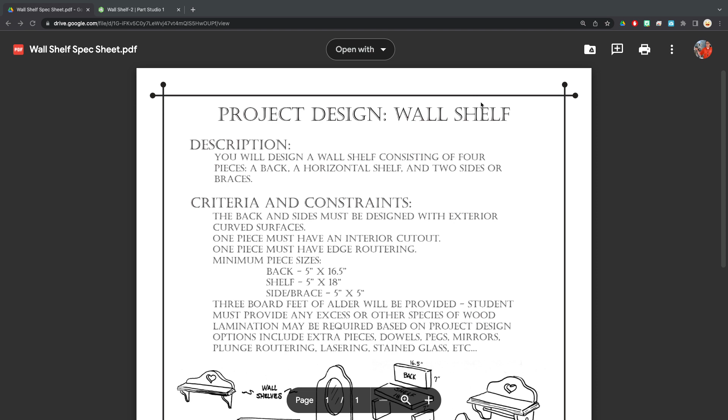What I'm going to do for you for the next few minutes is talk to you about your next steps as far as the wall shelf. First thing I did was print off some sheets so you guys had a place to draw some rough drafts. After you get your rough draft taken care of, we can start designing something in OnShape.

Now, this is the first time we are looking into something in 3 dimensions. Your cutting board, you only needed to draw in 2 dimensions. So we're going to look primarily at this very basic wall shelf here and build off of that, and figure out how to best incorporate OnShape and put it together so it's in 3 dimensions.

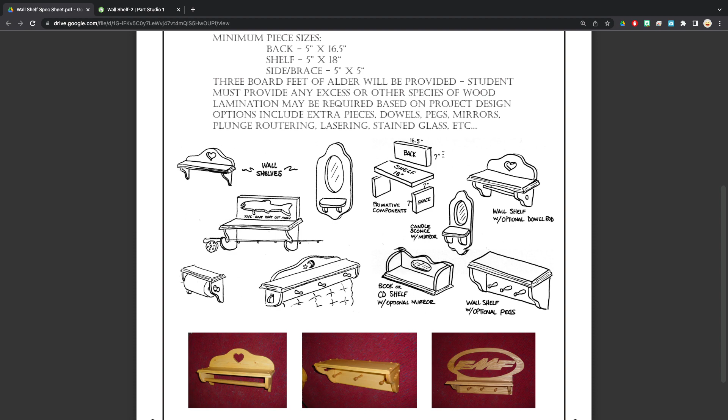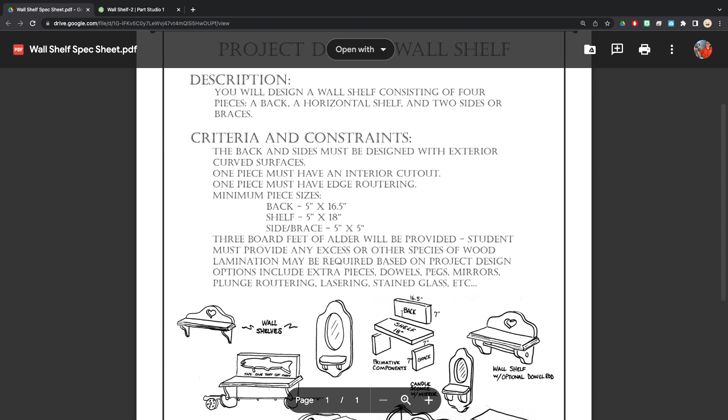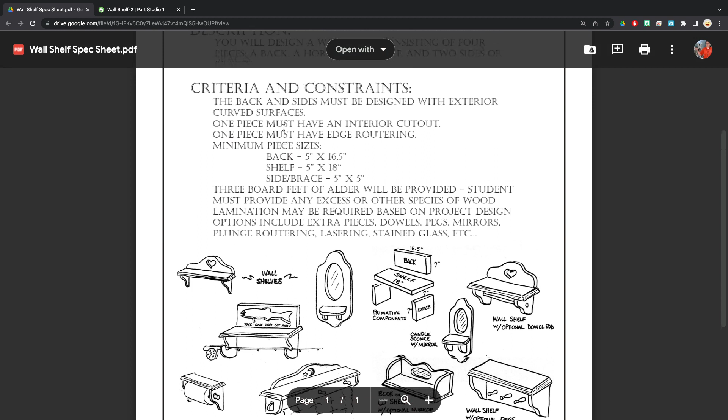For those of you that took engineering with me last year, this is just a simplified version of your pen project. So we're going to look at our criteria and constraints, relaying back to this graphic right here, where it's got back shelf 18 inches brace, called primitive components that you can't quite see because my screen is in the way. These primitive components are located also here as far as measures.

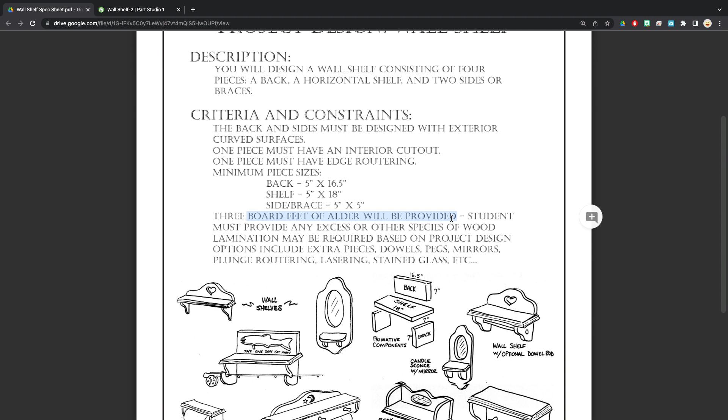So we're going to look at 4 pieces. We've got 2 side braces, minimally need to be 5x5. A shelf that's got a 5-inch by 18-inch component, a back shelf that's 5-inch by 16.5. And the one thing this does say is it's going to be cut out of 3 board feet of alder that will be provided. That alder is roughly about 3/4 of an inch thick.

So what we're going to do is we're going to start with a new OnShape page. I just went into OnShape, did a new document. I called this wall shelf 2 because you may have seen my previous wall shelf that's got the C-shaped brackets for my first name. Very basic. Okay, I want to walk you through how to get all of these parts put together.

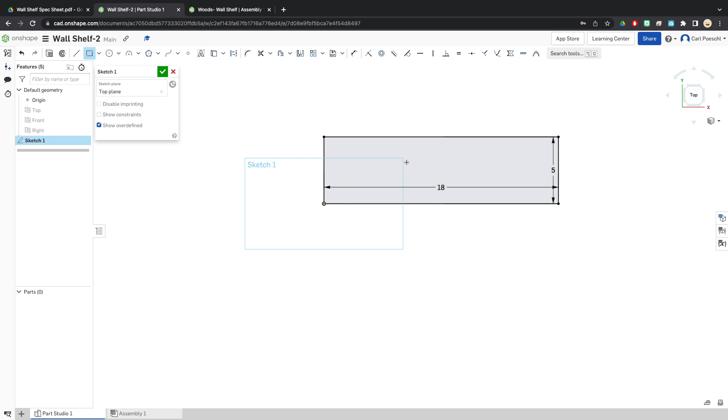So first thing I'm going to do is start with my shelf. I'm going to use these basic measurements here, and this is all minimal. So 5x18. I'm going to start at the top view, new sketch, top view, mute everything I don't need. I'm going to do a rectangle, corner to corner. I said that was 18 by 5. There's our shelf.

Go back into isometric view. We're going to do something called an extrude. So what you saw me do, let me backtrack just a bit and slow down. If you're in this sketch where you're editing all of your dimensions, you just need to click this green check mark and you're done with your sketch, and you have this rectangle.

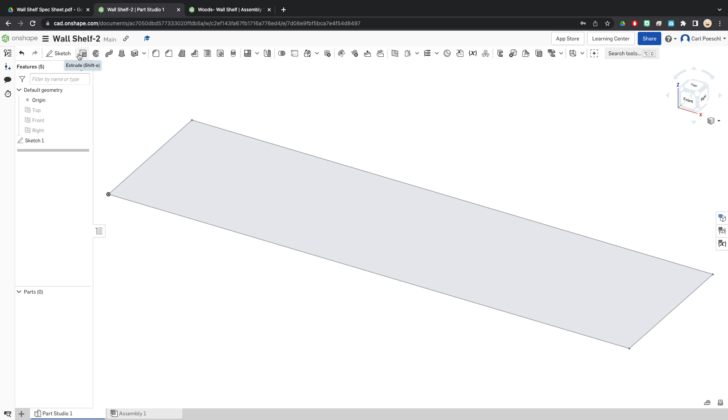Now, what we haven't talked about is how to make things in 3D. You'll notice the button next to sketch has these 2 little boxes. It's called an extrude. So if I click extrude, I can then go ahead and grip my rectangle and I can start to make a 3-dimensional object.

This is about where we stopped with the power of OnShape with your cutting boards, because we just assumed you're going to have the same thickness throughout. The majority of you went with about 1 inch or potentially 3/4 of an inch, and we're going to do that same thing in OnShape with our alder at 3/4 of an inch.

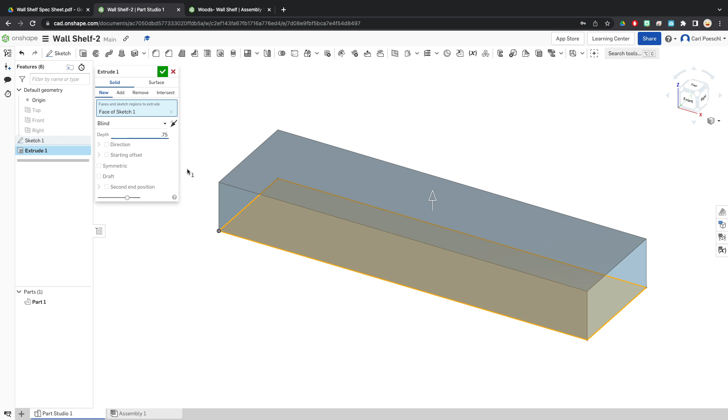So all I did was hit extrude, I clicked the rectangle. It's going to say we're going to create a new solid out of the face of sketch 1, and we're going to go at a depth of 3/4 or 0.75. Hit enter and finish our extrusion, and this is going to be the bottom of our shelf.

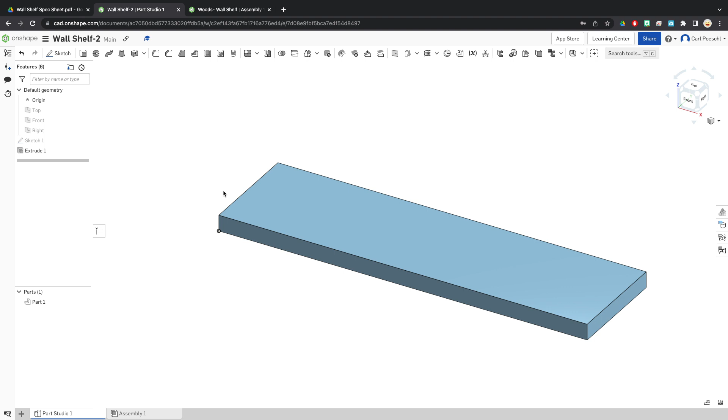Awesome. If you look at my other piece though, that's 1 of 4. So how do I make the other pieces to it? This is one of my favorite parts of OnShape, is that literally every single document that you need to put together is going to be contained within this document. Every single part that you need to make is going to be contained inside of this document. So if you take your cursor down into the lower left-hand corner, you can insert something called a new element.

And what we're going to do is create a new part studio. You'll notice what I'm drawing on right here is called Part Studio 1. So you can imagine if I click a new Part Studio, I now have Part Studio 2 down here. This is going to get a little bit convoluted though, so I'm going to call this something different.

And the way you do that is you either right click or hit control click if you're on a laptop like your Chromebooks, or God forbid Mr. Godwoz's MacBook Pro. So control click or command click or right click if you have a mouse, hit rename. And I'm just going to call this shelf.

Now I can go in and rename my Part Studio 2, which I'm going to name back. And I'm going to create one more.

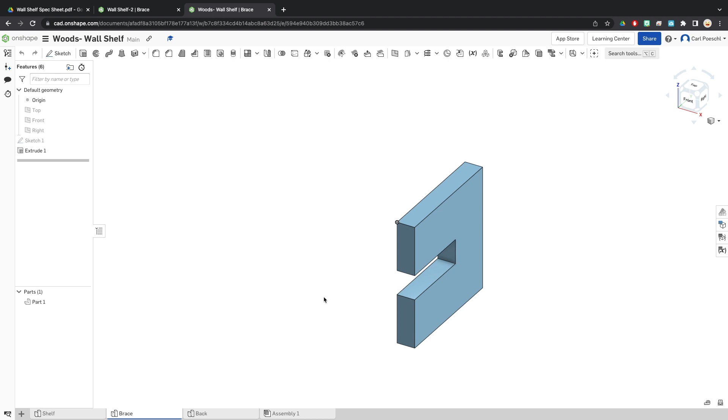And we're going to call this the brace. Now the coolest part about this is that I did say you need 4 parts in total, but I only need to draw this once. If you look at my first shelf that I made just for practice, you'll see it says shelf, brace, and back. I don't need to make more than one of these braces for this to work. I'm going to go ahead and change that when I'm ready.

So I've got my shelf taken care of. Let's go ahead and start working on the back. The back, I like to have the geometry on the front plane. I'm going to look at it from the front side. That's how we're going to take care of things.

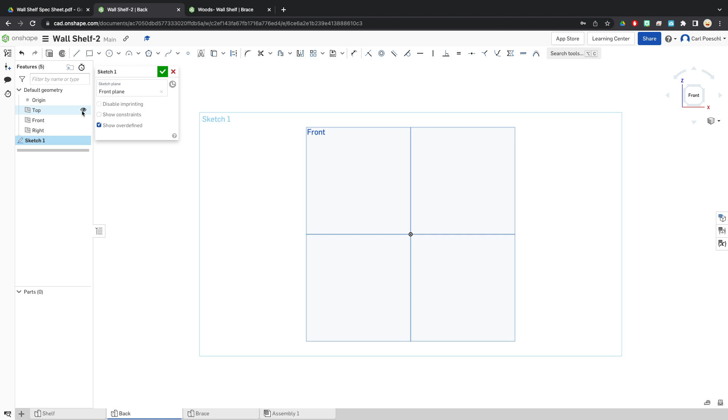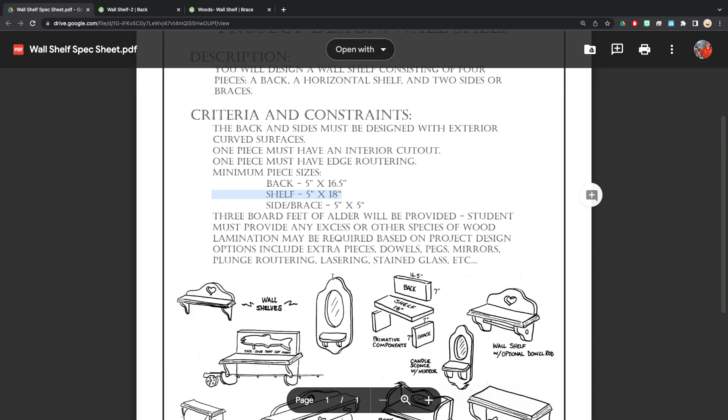So delete all of my other views. I'm going to go in and draw a real quick something or another. I believe it's 7 by 16.5 on here. This, even though it says 5 by 16.5, also says 7 by 16.5. That's all right, so we're going to say 7. 16.5 on that one and 7 on the other. And our sketch is finished.

Now, I didn't do anything very cool on the backer for my first shelf, so I'd like to change some things. So what I'm going to do is continue editing the sketch, and I'm going to use something called the spline tool. The spline tool is really easy in terms of trying to make different shapes.

So what you end up doing, I ended up finding the midpoint of my shelf. I kind of want to make some really bulbous looking back that looks kind of cool. I'm going to try and relay this to match up with some other elements.

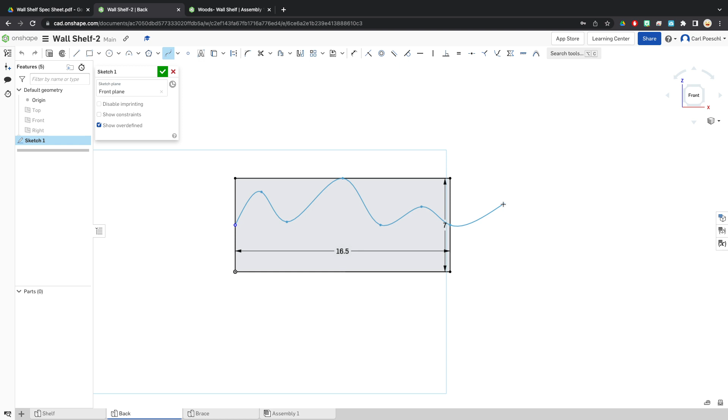And then once I'm done, I'm going to escape. Oop, that's not what I want to do. Draw some mountains, I want to attach that to the midpoint. Go down, go up, back there, and then hit enter or escape. Perfect, you hit escape, got it figured out, folks.

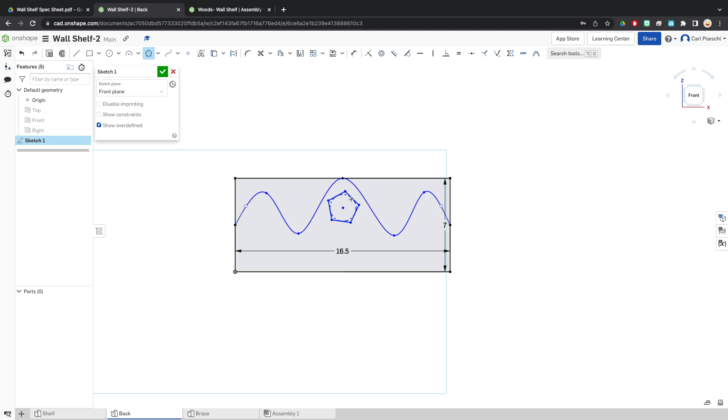We're all good. Okay, so I want to create this kind of mountain range, if this were Mr. Patel drawing from way back when he was a teensy lad. I also am going to do something with this inscribed polygon tool because that looks kind of cool. So I'm going to put a hexagon. Oh, pentagon, let's do that. Right there. And you'll notice that once I finish my sketch, I have all sorts of different elements to it.

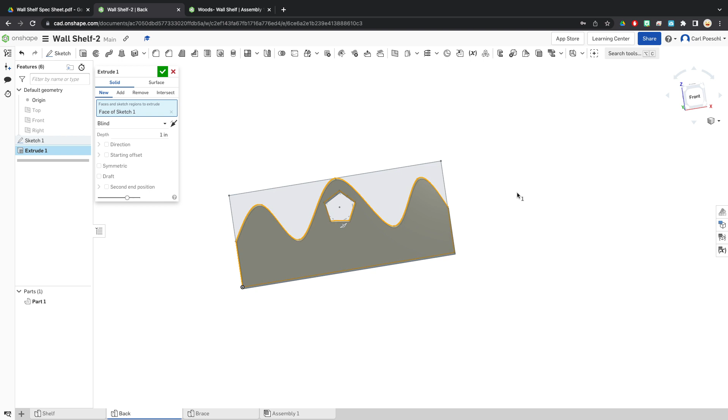But it is still gray, which means that we have a sealed project. Perfect. What I'm going to do for extrusion this time, instead of grabbing the entire box, I'm just going to grab the part that I want to extrude. And you'll notice that it doesn't get anything else. Easy. If I did make a mistake and wanted to cover that up, I could, but I don't particularly want that.

I'm going to put my pentagon right there. Keep in mind that our alder is actually going to be 3/4 of an inch thick. And there we go, here's my backer.

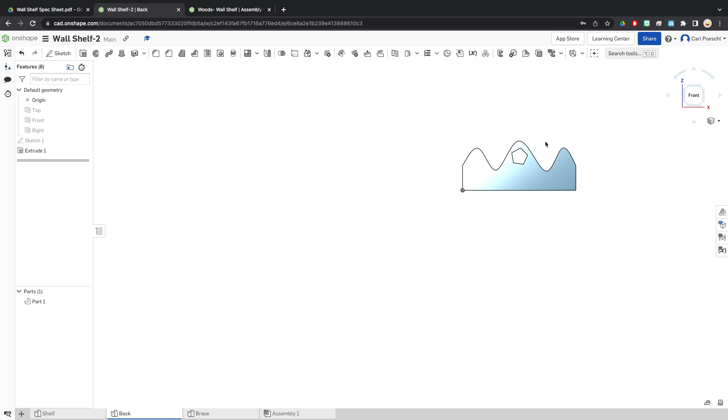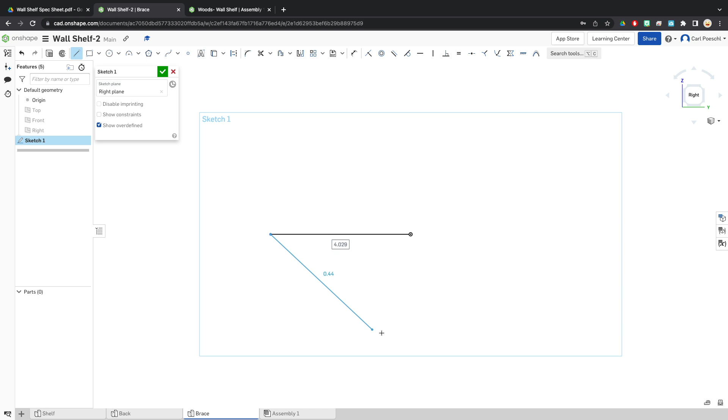For the sake of time, I'm going to really just quickly go through and make a brace. I like to make the brace on the right plane. I'm going to get rid of all these other ones. And I'm just going to really quickly do a triangle. I think triangles do just fine as braces. I'm just going to drop this down, drop that down, connect them.

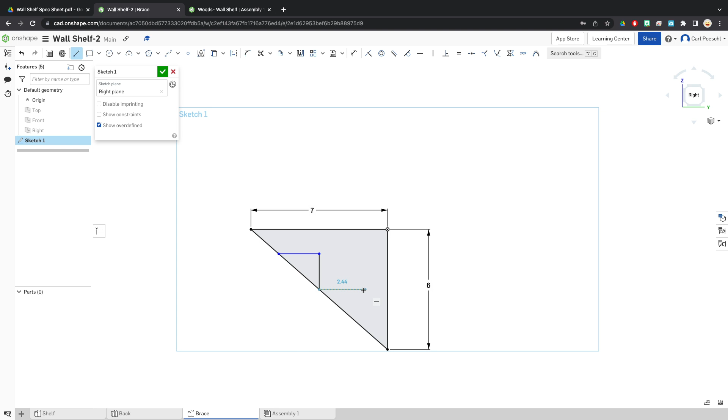Perfect. Do need to make some adjustments because I feel like our brace needs to be 7 inches. I'm going to make this side 6 inches just for funsies. And you know what, for another funsie, I'm going to make some other things that look like that. Sure, this looks cool. Excellent, okay, finish that, go ahead and extrude.

Not sketch, we're going to extrude that part. Our alder is 3/4 of an inch. And we're good to go.

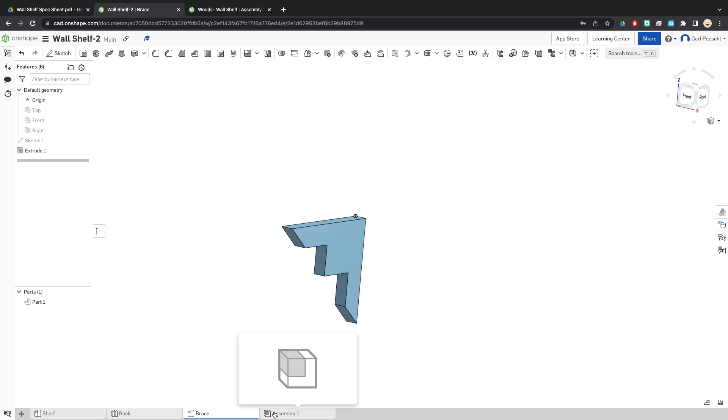Perfect, we are ready for this last one. You'll notice that there is a box called Assembly. That tab actually represents an ability for us to put all of our pieces together, like you saw in my first example. So what I'm going to do is hit Assembly, and I'm going to start placing items into my assembly.

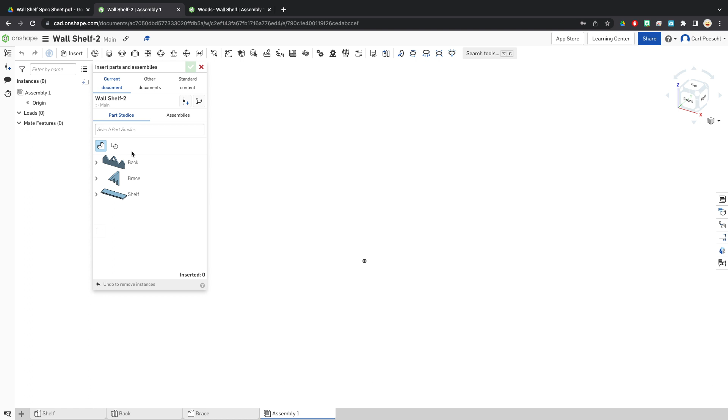So if you notice under Insert, go ahead and open that up. It automatically brings in the parts that I've been working on. Okay, so I'm going to bring in my back. Oop, zoom out a little bit. I'm going to bring in my brace. Here's the awesome part, we need 2 braces, so I just click it and drop it again.

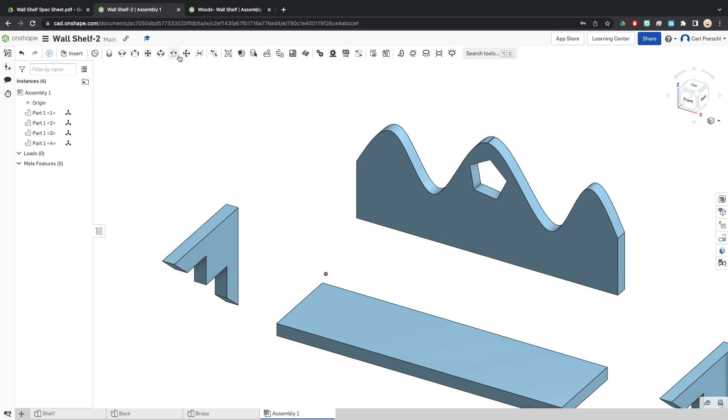Excellent, very nice, what I like to see. Easy. And then bring in my shelf. Okay, do have an origin point here. I'm going to go ahead and do a couple different things using something called a mate. It's like you're putting 2 pieces together. So we're doing a fasten mate. We also have different things like revolute mates, slider mates, planar mates.

We're not going to worry about those too much for right now, because all we need to do is a fasten mate where I'm going to mate certain elements to this project. Lots to unpack here, because you'll notice this little circle with a bunch of weird lines coming out of it—these represent your X, Y, and Z axes. You'll notice there are different points you could mate onto, as well as different orientations and planes. So the first thing I'm going to do is set this to my origin.

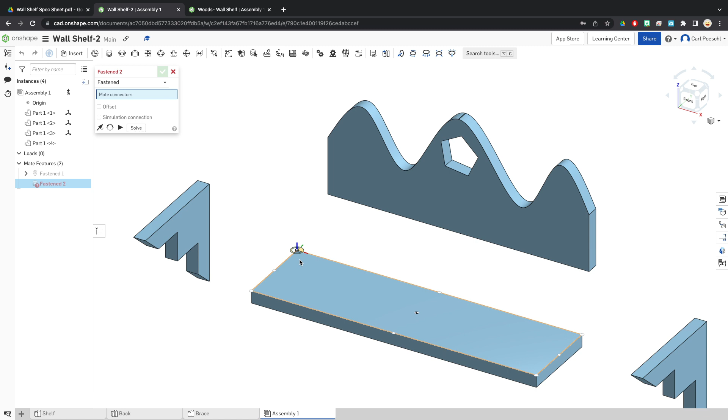I want to make sure that corner is in the origin. I also want to make sure I'm getting this flat face so that it references this top face that I have my cursor over. Now, I highly recommend you use a mouse, because you're going to need to do a lot of orbiting—revolving around using the right-click feature. I'm going to need to look above and below.

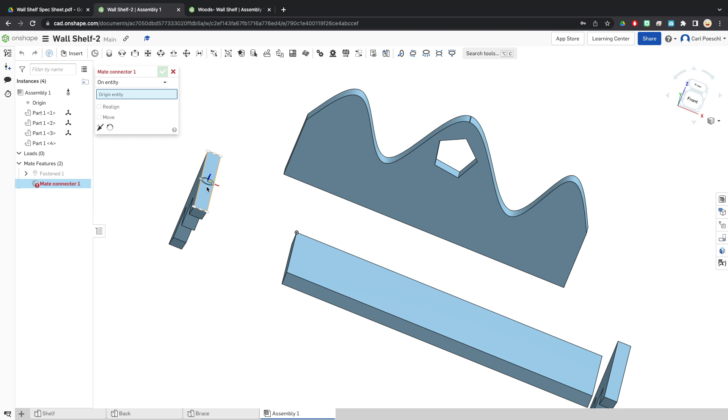So I'm going to do a fasten mate. I'm going to bring this brace over. Now, if I accidentally hit this middle portion and try to click onto the spot I need, watch what happens—I'm going to click there without thinking. And it didn't go. I think I need to do a planar mate.

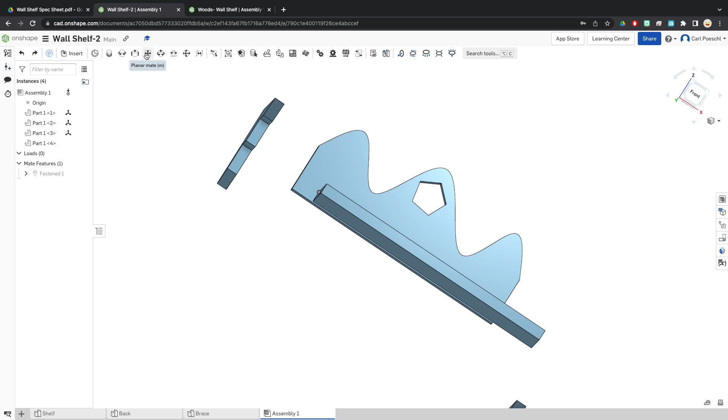Yeah, let's do a planar mate. So planar mate should be the only one we do. I'm just going to randomly click the very center of this. Oh, and you can see that my brace just literally went right to the very center. Okay, I don't want that.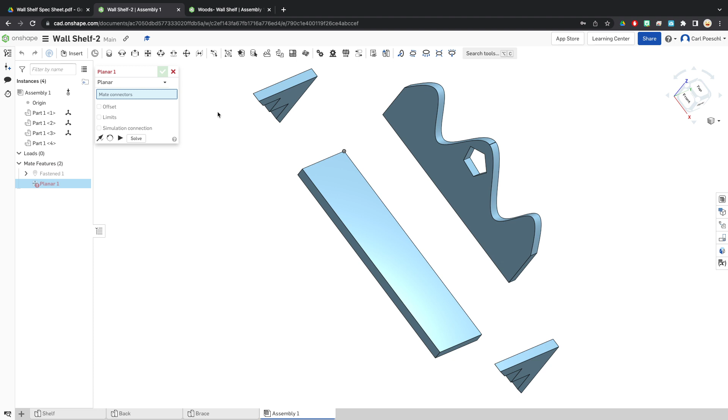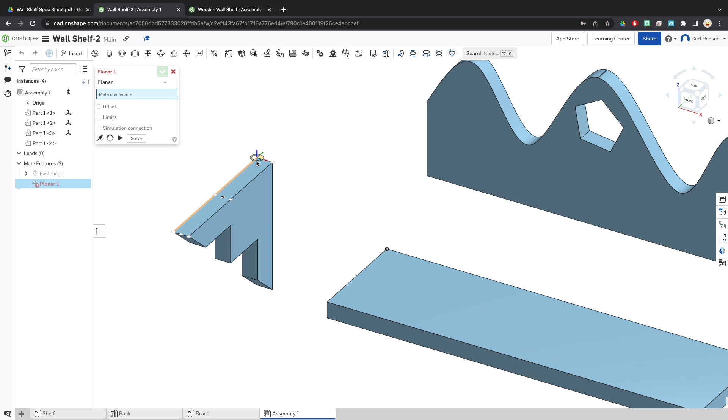So instead we're going to do a planar mate, and we want to be very particular about where we place our brace. I'm going to zoom in and try to get back to my isometric view. I want to make sure this corner touches the opposite corner on the bottom. So I'm going to line up that corner, rotate down—I'm looking at the bottom of my shelf, and I want that to fit right on that corner.

This may take you a few times to get correct, okay? And you may need to do some things where you're rotating around using this button here, rotate some things around, and make sure that everything is lined up how we need it to be.

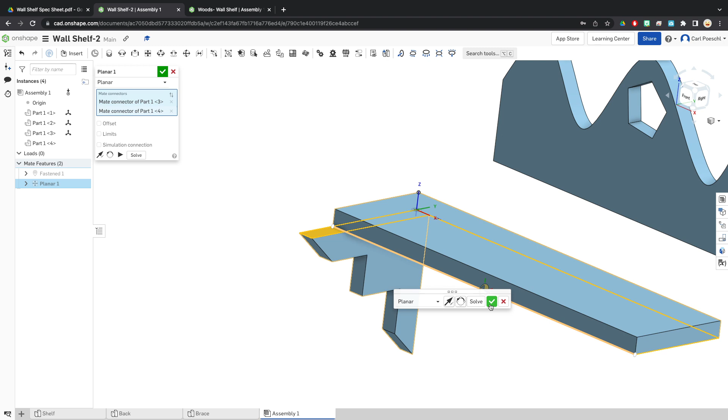Pretty simple. So now I'm going to do the same thing with this back. I'm going to do a planar mate, zoom in on my back and make sure I've got the right spot. Looks like it should be right about there. And it means I want to line up to this corner here. Perfect.

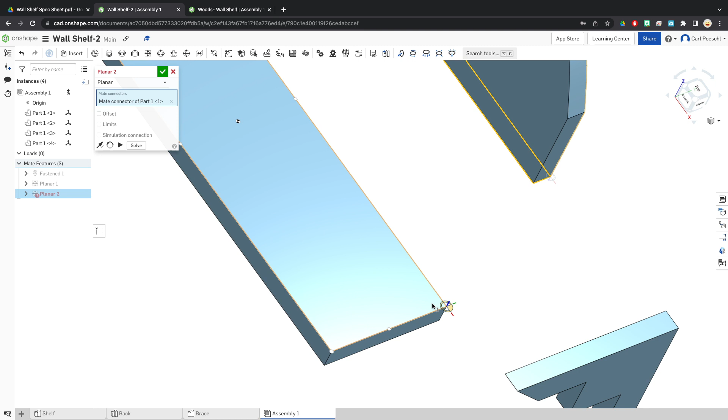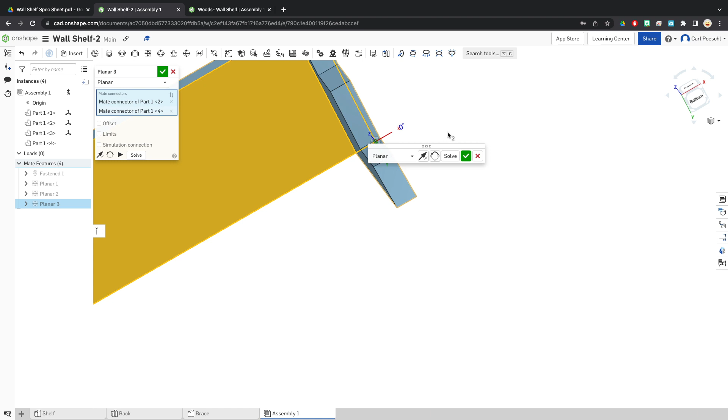We are moving and grooving. Okay, one more—I want to check to make sure I've got the right side this time, since I'm on the right side of the shelf. So I'm going to click that button. Looks great, line it up into that corner. Excellent, we are good to go.

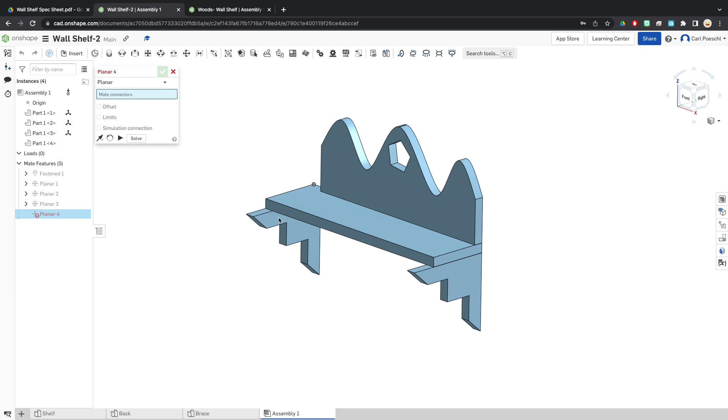Awesome, couple problems. First one: this shelf is kind of in a weird spot—I want this to come all the way to this edge. I also noticed that my shelf is not long enough. I made my braces 7 inches, and this is only 5 inches across.

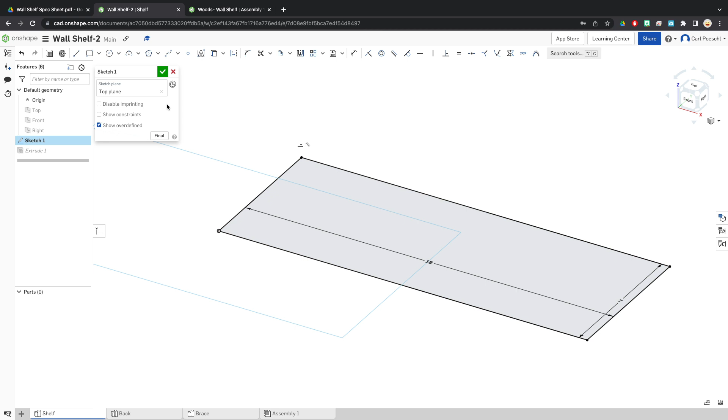Pretty easy—I can go back into my shelf, open up my sketch, redimension that 5, change it to 7. It makes it just a teensy bit wider. Hit OK. If I go back to my assembly, it automatically changes. How cool is that? Very cool.

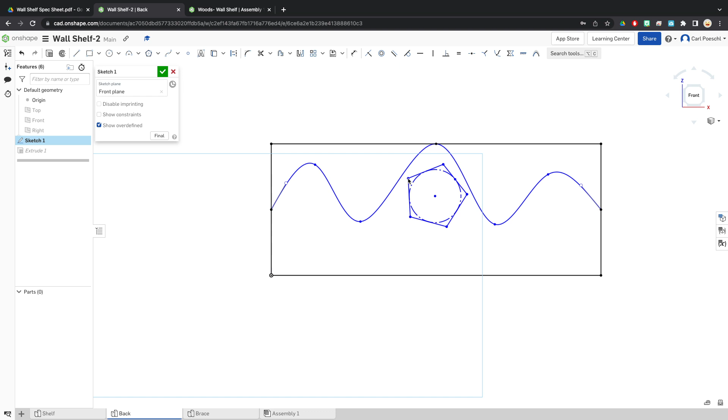I do need to move my pentagon. Oh no, it's stuck there. Oh, okay, there we go. All right, good enough.

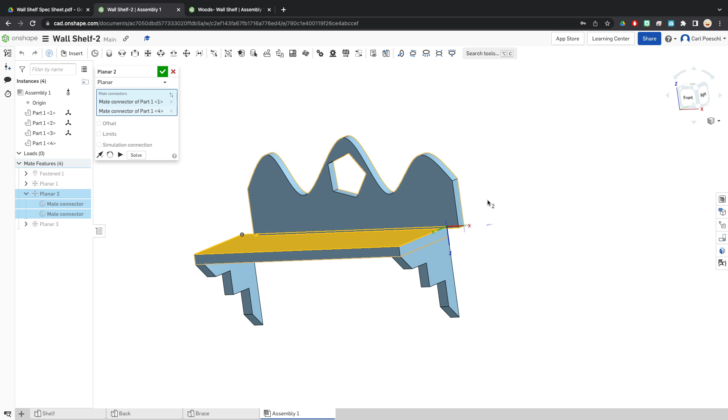And we may need to change that fastener. So what I can do is redo this planar mate, by deleting those connectors, and then I'll change it such that I've got that corner.

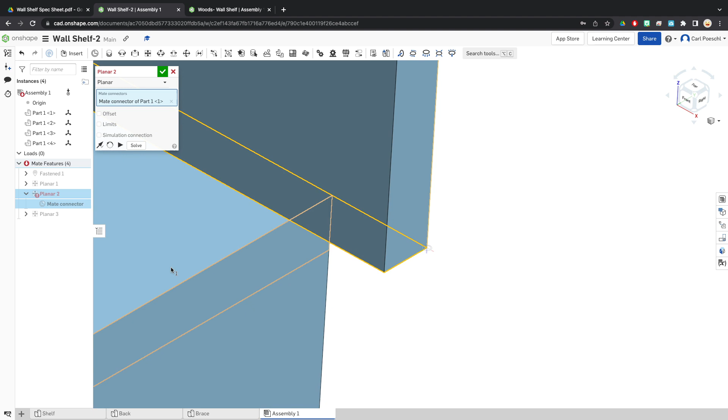This might be a bit tricky. Yeah, I need to move this. There we go. Planar mate, that corner—set to that corner.

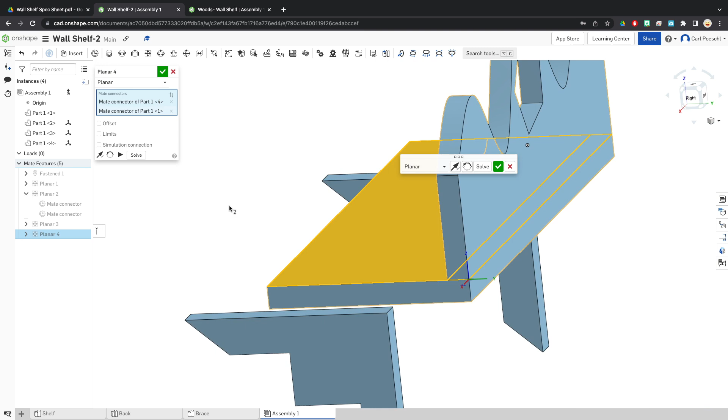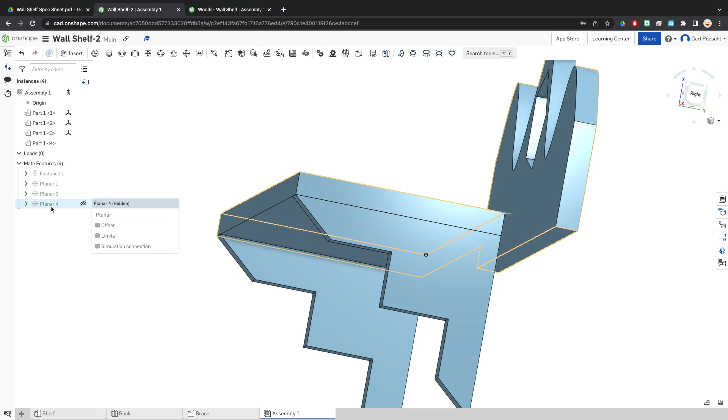I'll hit solve because it's kind of grumpy. Oh, didn't like that—we need to do the back first. Let's go ahead and do that again. Let's get rid of the second planar mate, honestly, because that's the one we had before. Are you going to work this time? Solve. Bueller. There we go. Okay, I don't know what I did, but it works now.